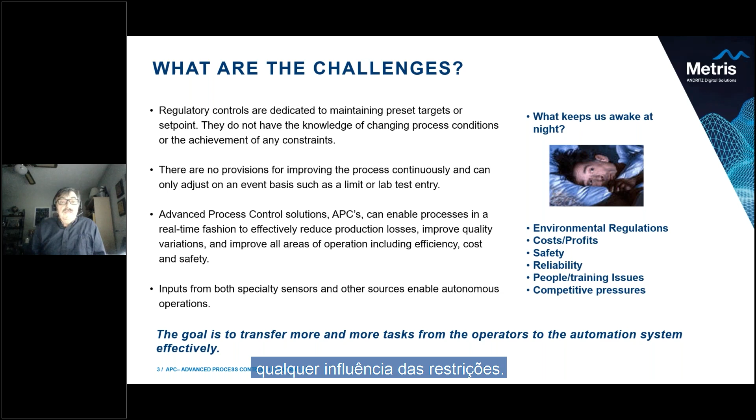Regulatory control, which has been around for quite some time, is dedicated to maintaining preset targets. It doesn't have any knowledge of changing process conditions or any influence of constraints. There's no provision for improving the process continuously, and that's where advanced process control, known as APC, can enable a process in a real-time fashion.

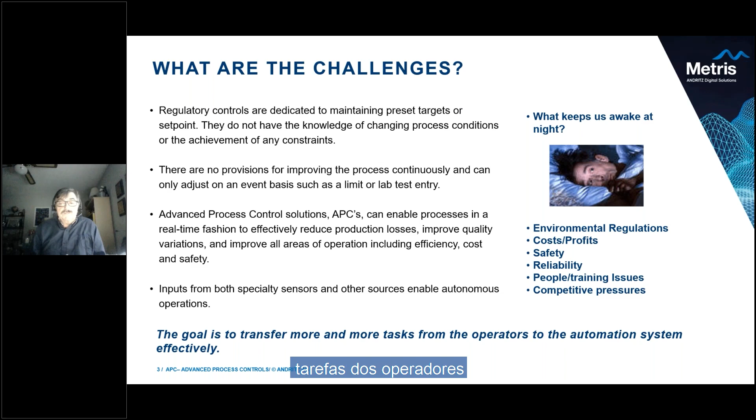Inputs from both specialty sensors and other sources are becoming readily available, which enable autonomous operations. The overall goal is to transfer more and more tasks from operators to the automation system effectively.

So what is advanced control? Control strategies designed to address a higher level management objective. These are centered around things like product quality, throughput, reducing the cost in euros or dollars per ton, reducing energy, and more assuredly complying with regulations such as environmental and all quality specifications. The bottom line here, it becomes a tool that can translate into a process control objective.

APCs can be an enabler to autonomous operations because with utilization of advanced process control, there is less human involvement, especially in dangerous environments where sensors can lessen the dependency of humans going into the process. They're available 24/7. They can be used to react in real time to disruptions, and the requirement for human experts on site every day decreases.

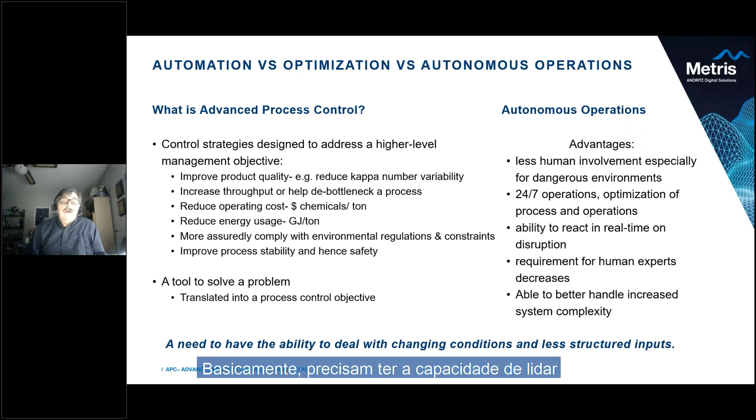Autonomous operations depend on remote operations, and they're able to handle increased system complexity. Basically, there's a need to have the ability to deal with changing conditions and less structured inputs.

As I mentioned, these have a foundation which enables autonomous operations. ANDRITZ solutions have the advantage of being totally integrated and aware of all process changes. The autonomous operations are enabled by the Metris UX/X system.

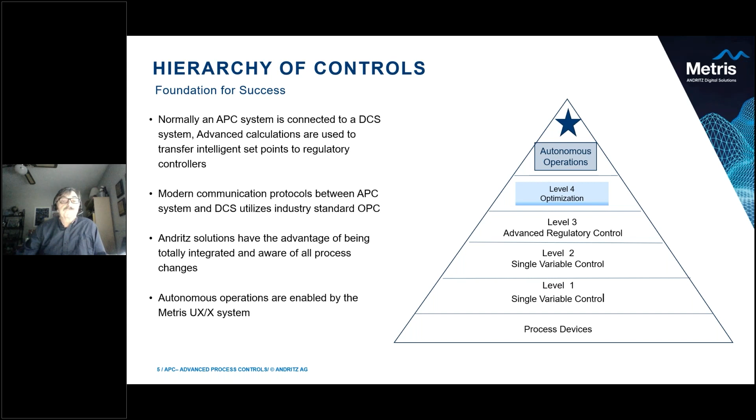So what's the difference between better control and optimization? When we look at control, quite often we consider poor control as a gap between a target and the process variable, as overemphasized on the left, where you have the oscillating process variable. Good loop tuning and good control can show up as less variability and stabilized control. However, that's only improved control, not optimized control.

The line at the top, as indicated by the specification limit, is where we want the process variable to spend more time closer. So making that change, depicted on the right, is allowing us to be closer to the operating limit in this case.

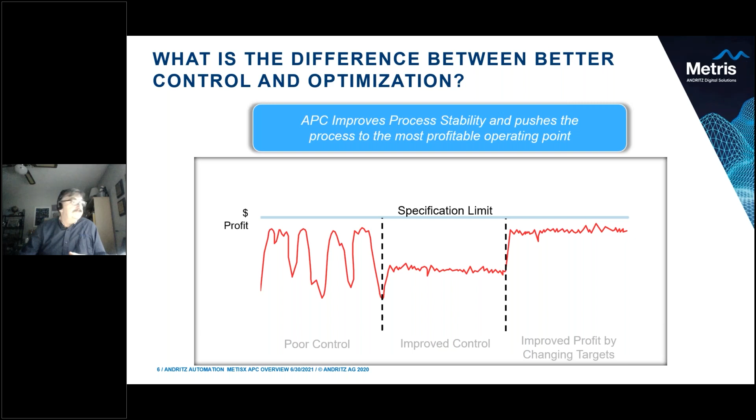So variability reduction in a broad sense enables economic benefits. In every process, there's usually a high side operating limit or a low side operating limit, such as if the customer wants to charge chlorine dioxide greater than 20 kilos per ton, it will destroy the pulp viscosity. Another limit could be if kappa numbers get above 70, it'll plug up the screening system. And of course, in the slaker, if it gets above 100 degrees C, it can cause a boil over.

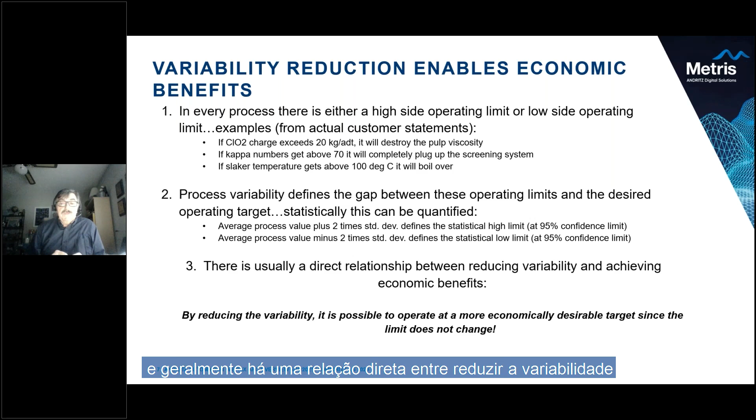So not only reducing the variability, but operating below, but as close as possible to limits, is very important. Process variability defines that gap between these operating limits, and statistics can be used to quantify this, such as an average process value plus 2 times the standard deviation, which defines the statistical limit at 95% confidence. Therefore, you can look at a process and determine how close it's operating to its limit. And there's usually a direct relationship between reducing variability and achieving results.

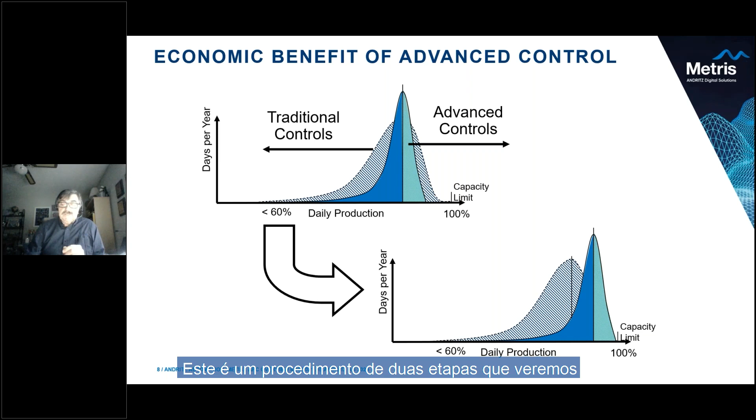So shown here on the left is traditional control, where you have some sort of spread of variability. The first benefit and requirement of advanced control is to first tighten up that and cause a reduction in variability, and then in this case take a target shift to the right, which is closer to the capacity limit. This is a two-step procedure which we'll see several times. So what is a definition of advanced control?

Advanced control is an enhancement of basic process control. It's not a replacement. It's aimed at delivering value to our customers through three main forces: throughput, quality, and cost. APCs utilize a variety of technology to optimize the process in response to business drivers, utilizing minimum resources without compromising throughput, quality, and of course, cost targets.

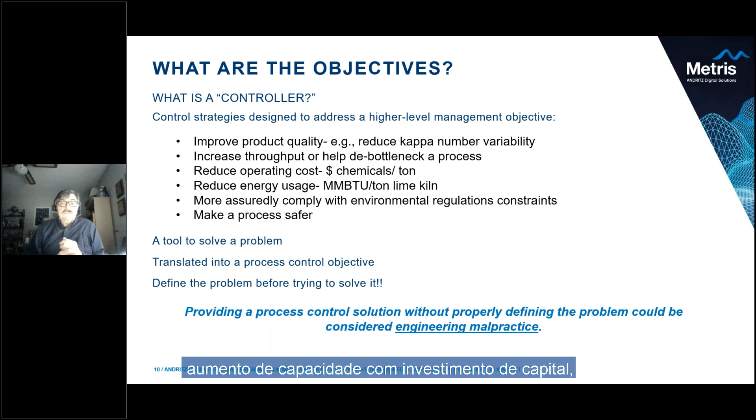What are the objectives? Well, a controller, broadly speaking, is designed to address a higher level management objective, such as a corporate goal to improve product quality, and this starts by reducing the kappa number variability. The customer could want to increase throughput. They have more orders, and it is very expensive, although possible, to increase throughput through a capacity increase with capital expenditures, but sometimes debottlenecking or shifting the variability of production can increase the overall throughput.

Of course, as I've mentioned, reducing operating costs such as dollars per ton, reducing energy, and obviously reducing any environmental constraints. So with better control, you're going to have less upsets, better washing control, will use less fresh water, which puts less load on the environmental system. And obviously, number one is to create a safer process for the operators.

So providing a control solution without properly defining the problem really is the wrong way to approach it. In order to apply a solution, understanding what the real problem is, is paramount.

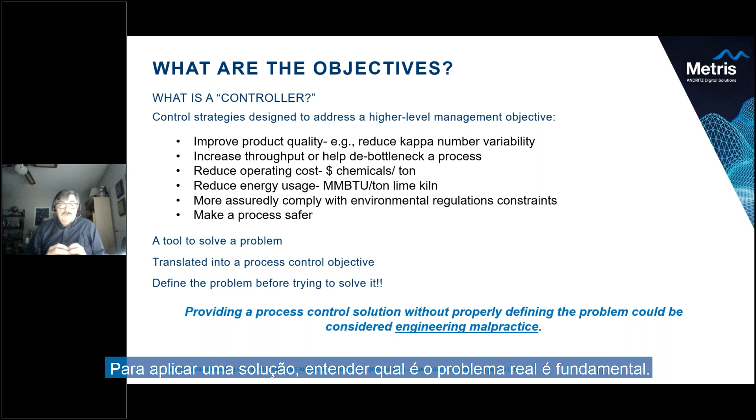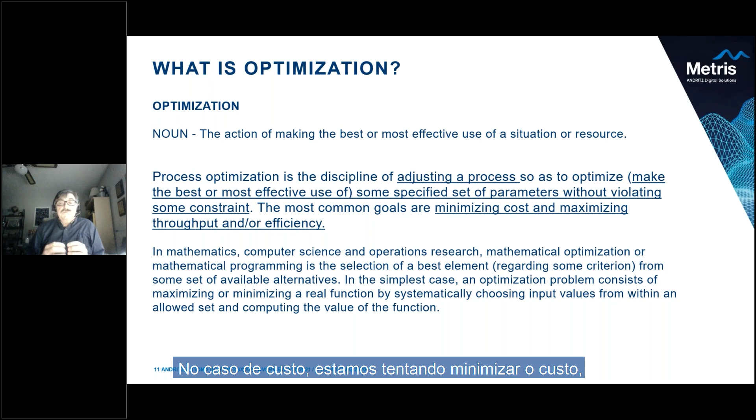So what's the difference between control and optimization? Well, broadly defined, optimization can be a noun. It's the act of making the best or most effective use of a situation. It's a discipline of adjusting the process so as to optimize, using some sort of set of parameters without violating a constraint. In the case of cost, we are trying to minimize the cost, maximize the throughput.

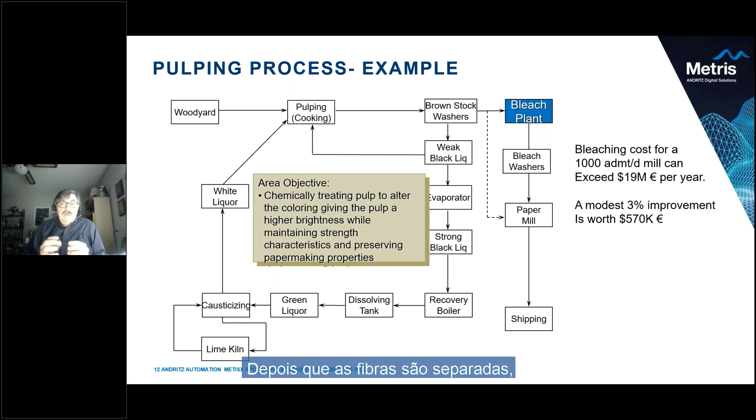So I'm going to look at the pulping process here and focus in on the bleach plant. As we know, the bleach plant is an important process. After the fibers are separated, most of the lignin is removed, and we've recovered the liquor. It goes to the bleach plant for final purification and quality control.

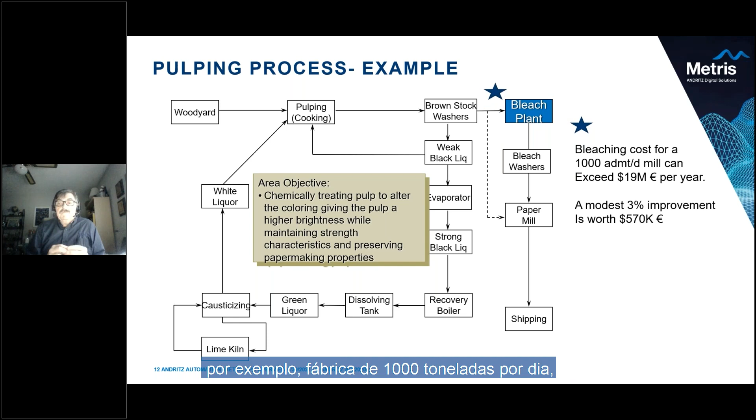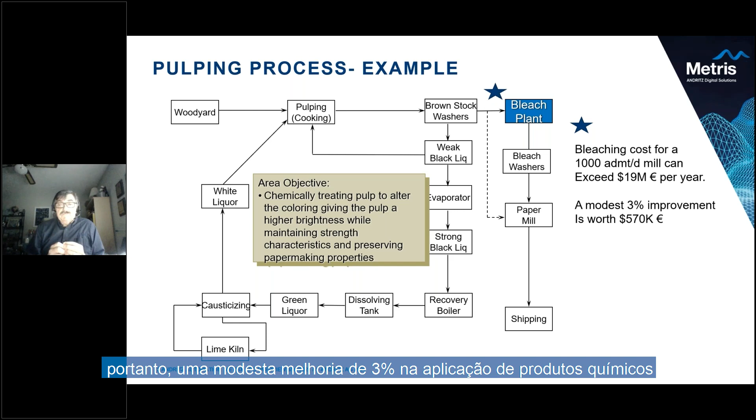It's also a very high cost area. For example, a 1,000 ton per day mill, the cost of bleaching can exceed 19 million euros per year. So a modest 3% improvement in the application of bleaching chemicals could be worth over €500,000.

So quite simply, starting with a loop, this is the front end of a bleach plant where you have a simple loop. We're applying chlorine dioxide, and at the very basics, we're ratioing it to the production. Therefore, we take the mass of pulp and the flow and concentration of chlorine dioxide. We could put it in a mass-to-mass or percent applied.

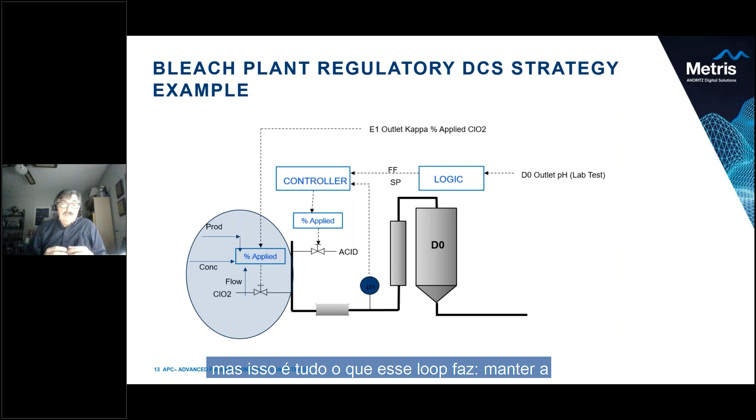So if an operator puts a target in, the regulatory system will maintain this loop to keep that percent applied dosage. Any influences, pressure compensation, variations in the flow, at some point will reach a limit where the valve is either 100% open or closed. But that's all this loop does, is maintain the percent applied, and that's known as a regulatory loop.

However, in the case of bleaching, similar to most other processes in pulping, it's actually a very highly interactive process. So even though we're applying the chlorine dioxide on a mass-to-mass basis of the flow, if there is a change in kappa, such as the kappa increasing, then the brightness will drop unless there's a corresponding increase in the chlorine dioxide.

If the production rate increases, even though the chlorine dioxide, which is ratioed to production, will increase, the retention time in the towers will change and the reaction rates will change, and that too will have an impact on the brightness. So even though the entire process is set up with single loop regulatory controls, it is important and necessary to have a higher level strategy.

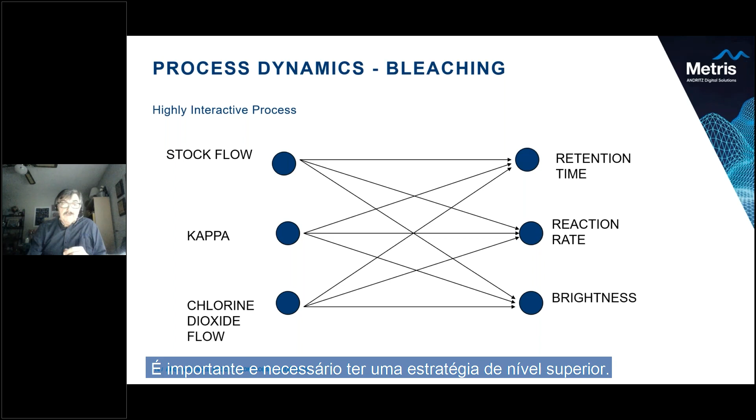So one of the possible solutions that's been identified and is very effective is termed MPC, or Model Predictive Control. This is a control technology that's been utilized for many years in other industries such as hydrocarbon processing. Today it is being adopted and used in other industries such as cement processing, minerals, and of course pulp and paper. It is a proven technology and it provides control solutions using constraints.

It also takes advantage of feed-forward disturbances, sometimes measured, sometimes not measured, and it has the ability to utilize feedback. And it's designed, in the case of bleaching and other pulping processes, to handle delays and strong interacting loops. This makes it a perfect technology to utilize.

On the paper side, our industry was quick to adopt it, primarily due to the availability of sensors and measurements. QCS systems are standard, CD and MD controls, and with the aid of a scanner, the economic benefit of having your paper machine or pulp dryer on control is well established.

On the pulping side, however, it's been much slower due to a general lack of measurements, lots of connected yet not coordinated processes, and challenges with the connectivity to the underlying DCS. Many DCS systems traditionally did not have the horsepower in order to calculate some of the requirements of a model predictive control. And over the years, many attempts have been made with alternative technologies with positive results, but still not optimized results.

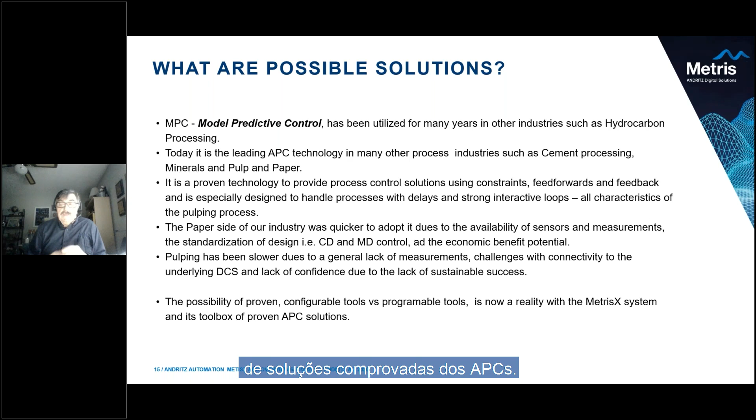As I mentioned, MPCs do have a history. They've been around in the process industry since the late 70s. There have been several examples of model predictive heuristic control, and then later dynamic matrix control. Model predictive heuristic control was later called model algorithm control. DMC was presented back in 1979, and it has been widely adopted. The optimal inputs were computed as a solution to a least squares problem.

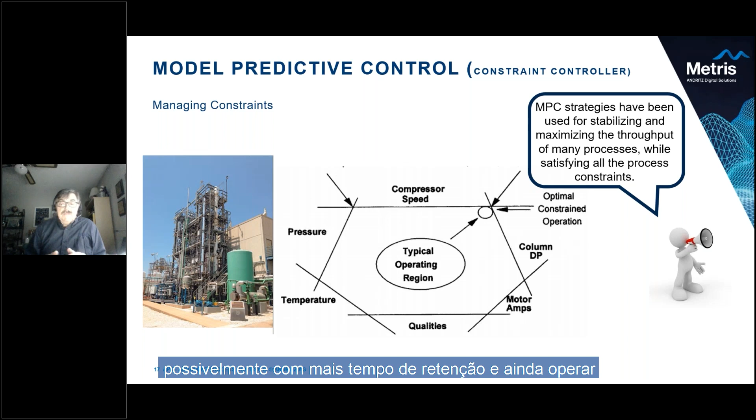MPC strategies are used for stabilizing and maximizing throughput while satisfying all the process constraints. I'll show some other examples, but you can have a reaction that is allowed to give up some temperature, possibly with more retention time, and still operate within the sweet spot, which is known as the typical operating region.

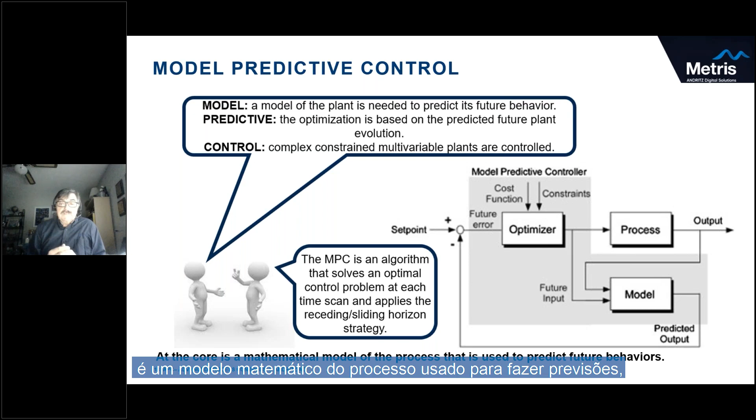...information that has been garnered, such as how the constraints interact, there is a cost function which allows the predicted output to be constantly compared to the set point or the target, and then over a horizon, see what type of change is required. At the heart of it, it's a mathematical model of the process that is used to predict future behaviors.

So the PID only knows what's happened and adjusts the controller based on that, with no knowledge of what's coming. However, the MPC controller has a model of the process, and the control target is maintained with knowledge of what's coming. If the model is good enough, it will always maintain the target.

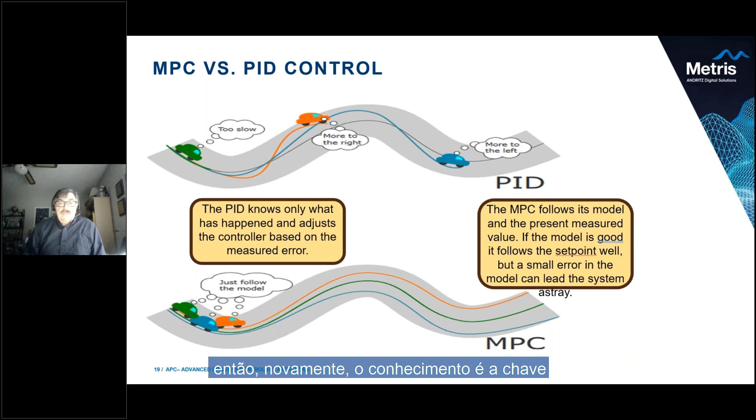However, models are never perfect, and we can utilize what's known as a feed-forward disturbance, where we can say it's raining out, so the road is getting slippery, perhaps slow down, and you are approaching a curve. So it also has knowledge that there are other cars on the road. Knowledge is key, and all of this in an MPC strategy leads to better tracking of the target.

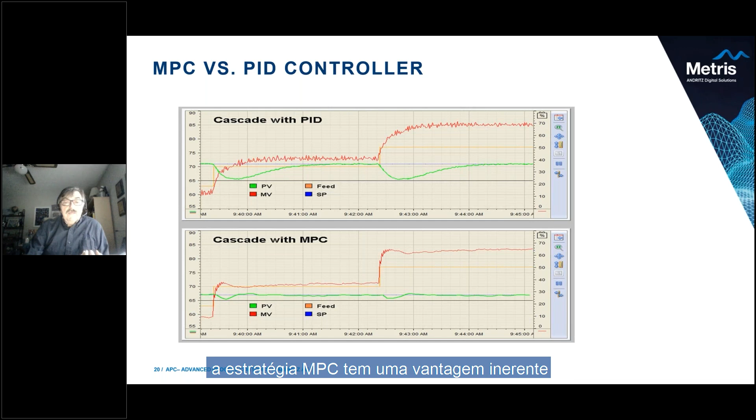So that's a very simplistic view of how an MPC strategy has an inherent advantage over a PID when handling disturbances.

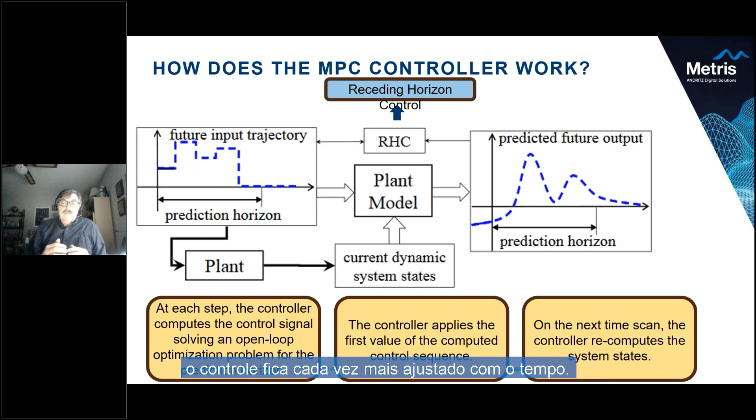That predicted behavior we can slice up, known as the prediction horizon. Each scan, we're looking at where we are relative to where we've been, as well as where we're going—this is very important. It's dynamic, it can handle changing conditions, and by looking at the receding control horizon, the control becomes tighter and tighter with time.

Depending on how you set the control horizon, you can converge to a solution very quickly, or at what's known as the settling time of the process. You can combine it such that any production rate changes to a lime kiln, for example, do not cause the process to go unstable.

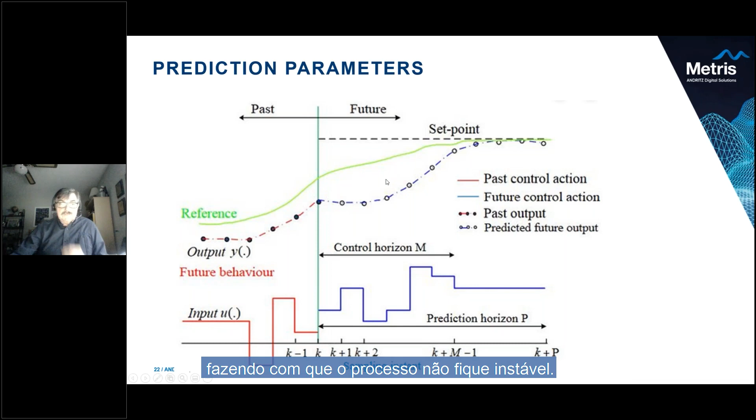Basically, there is an optimization within the MPC that's calculating control actions for the duration of the horizon. The horizon is an adjustable parameter that can be set in the configuration, and what you're trying to do is minimize the cost function between the minimum and maximum prediction horizon.

By tightening up the specification, the control actions are made to predict what's going to happen based on what has happened. This is the key of having a model of the process and having knowledge of where the process has gone as well as where it's going.

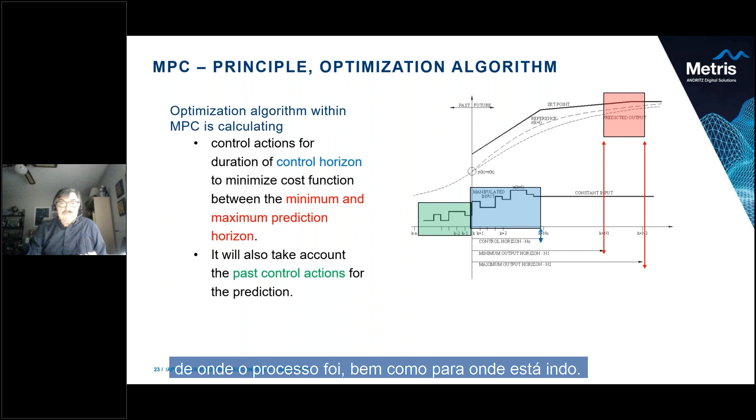So compared here with Unit 1, we can have a collection of the Level 1, Level 2, regulatory Level 3 controls, and every individual PID algorithm would have to be handled independently. Some sort of logic would have to be used to check constraints, and then finally through the DCS, you would put some intelligent set points.

When you're using a model predictive controller, not only do you have the model of the individual process, in this case it's taking up 2 of these controllers, but now we have what's known as local optimization. So the DCS is operating every second. The MPC can operate fast, but it also can be slightly slower because it's going to take the past and future behavior.

And now we have the ability of getting information from an even higher level, which is a plant-wide optimization. So if the production rate is changing at the digester, we will know eventually that production will go into the bleach plant, which not only requires us to adjust some of the conditions of the bleach plant, but we will need more chlorine dioxide. Conversely, from the washing operations, more liquor is going to be sent to the evaporators and then eventually to the recovery boiler. So we go from individual unit coordination to area coordination to mill-wide optimization.

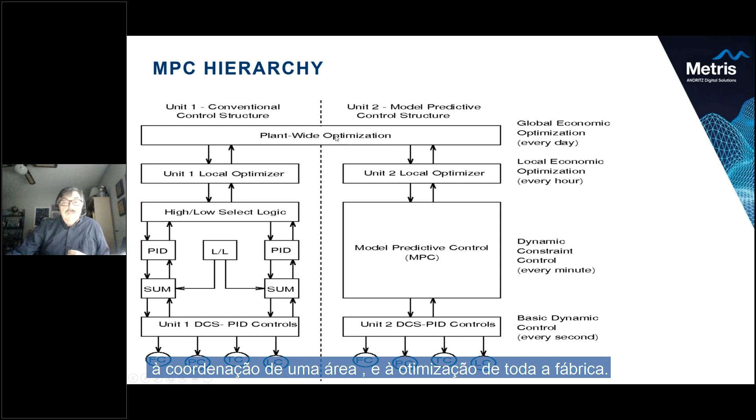So benefits of an MPC: dead time, which is one of the major constraints in the pulping industry due to the long reaction times, as well as the many inventory towers that separate processes, is very difficult to compensate for. There's been many attempts, such as a Smith predictor, to try to compensate for variable dead time. But with an MPC, which is the basis of our APCs, dead time compensation is inherently built in.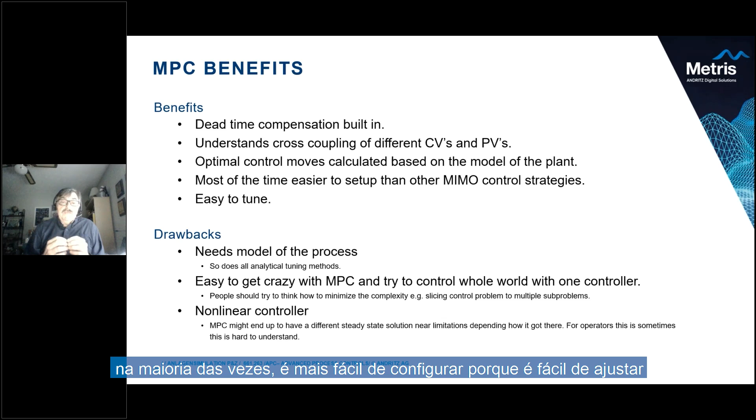An MPC algorithm understands the cross-coupling, so it knows that different CVs and PVs are related, and the interactivity and interaction of the variables are identified. Optimal control moves based on models of the plant, and most of the time it's easier to set up because it is configurable and easy to tune.

Drawbacks are a model of the process is needed, and sometimes people are turning to first principles models, which can be used, and ANDRITZ has tools for that, but a more accurate, robust model can be done by real-time optimization and analyzing the process online. So some of the uncertainties that a first principles model cannot capture can be collected.

It's easy to get crazy with MPCs and try to make gigantic MPCs. It's still good to think about how the process is operating and how we can minimize the complexity. What is the most important or low-hanging fruit that needs to be taken care of first?

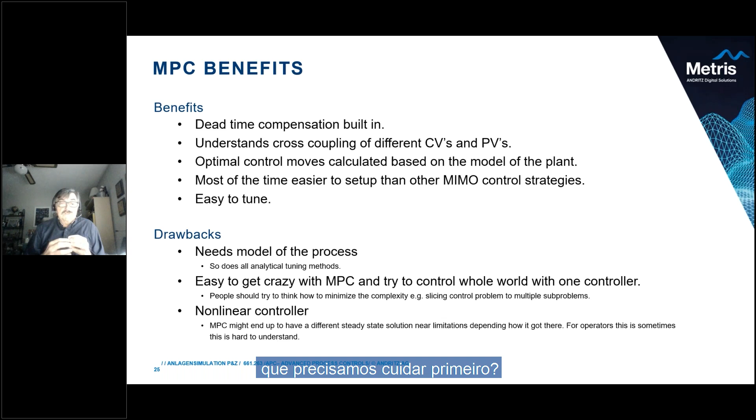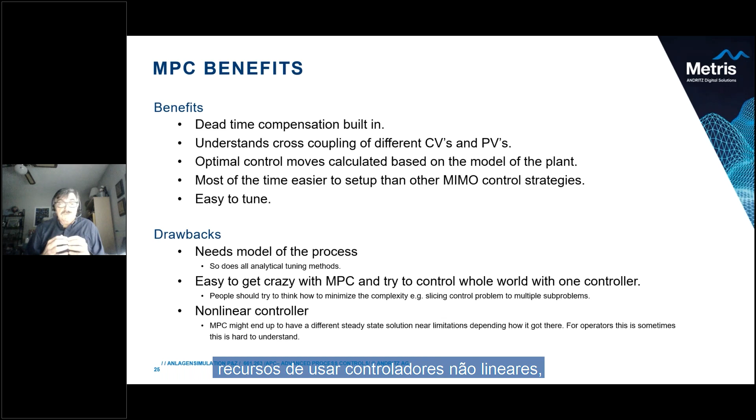Many processes are nonlinear, and an MPC is based on a linear optimization, but what we do is in the range of operating targets, you can make a linear assumption. And of course, there are capabilities of using nonlinear controllers. But for most of the pulping processes, due to the relatively tight targets, it is possible to use the assumption that the process is linear.

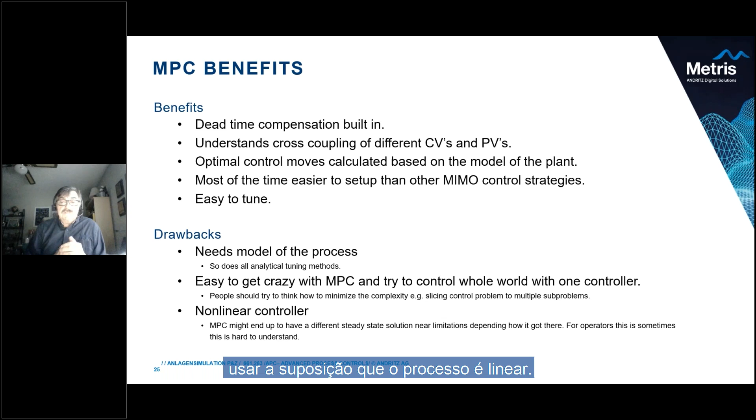But how do you choose the proper solution? Going back to the bleaching example, there really is no one size fits all. Is there a reliable model of the process? Can you excite the process outside of the noise, known as a step test or a bump test, to try to glean information that will allow you to give the history of how the process dynamics behave?

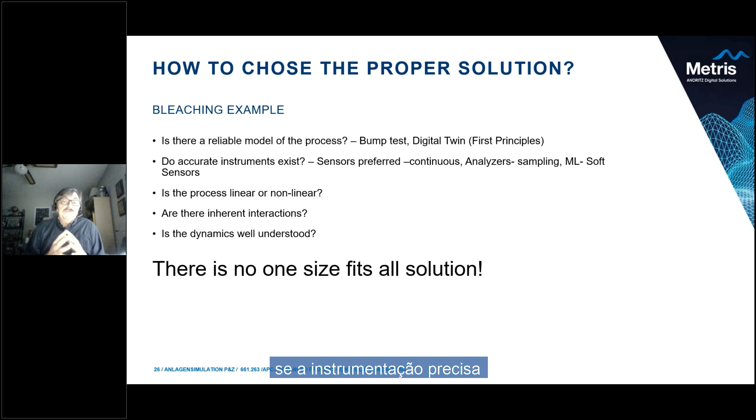Digital twins can be used, including first principles models. However, do you have accurate instruments? Because in both cases, using a first principles model or doing a dynamic bump test, if accurate instrumentation is not available, it's very difficult to get proper information.

Sensors or inline measurements, which are also continuous, are preferred. Although there are many analyzers on the market that are sampling systems, and they too can be used, understanding that they are discontinuous. And then of course, we have machine learning tools that can create soft sensors where measurements do not exist. As I mentioned before, knowing if the process is linear or nonlinear.

Color development or brightness development overall is a nonlinear process, but in the regions that we're operating, we can make some very valid process linear assumptions. It is important to understand and identify inherent interactions, and some of those interactions, such as chip quality, may not be measured, but we know what the impact is. Like if the top separator amps start to go up, we can infer something is changing with the chip conditions.

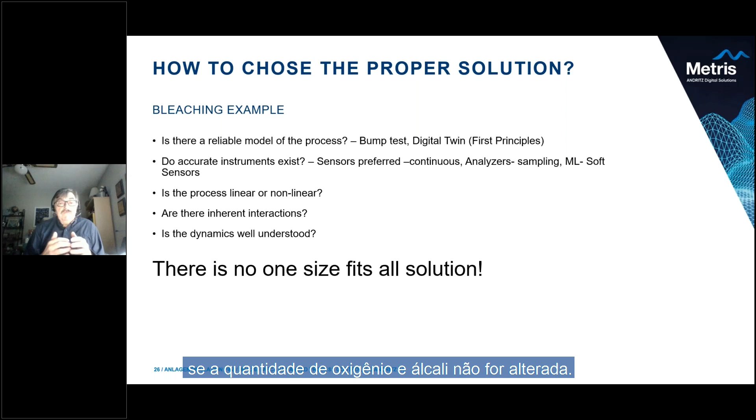And then most importantly, are the dynamics well understood? So in oxygen delignification, the kappa coming into the reactor is going to have a complete relationship to the discharge kappa if the amount of oxygen and alkali are not changed.

So taking a look at the first two stages of the bleaching process as an example of building an APC, I've observed that even though there's two stages, they work in conjunction with each other. And even though they're in the bleach plant, brightness is not the primary control objective for these two stages.

They can be referred to as an extended delignification stage because you must remove the remaining lignin before you start to brighten the pulp, because lignin that is bleached will not be stable, such as newsprint, which is lignin containing. When they brighten it, for example, with peroxide, and newsprint is exposed to the ultraviolet rays of the sun, the cover of the newspaper can revert and take on a brownish color. That is because the lignin was not removed, it was chemically altered.

For most fine papers, copy paper, dissolving pulp, we want to completely remove the lignin. So in the case of those grades, the first two stages of the bleach plant can do that through various oxidants, which are not limited to just chlorine dioxide. The EOP stage has peroxide and oxygen at its disposal, and the sum of all oxidants can be used in an APC strategy with knowledge of the incoming kappa and the target at the EOP washer to control this as one process, dynamically optimized to ensure that the degree of delignification is kept constant at the lowest possible cost.

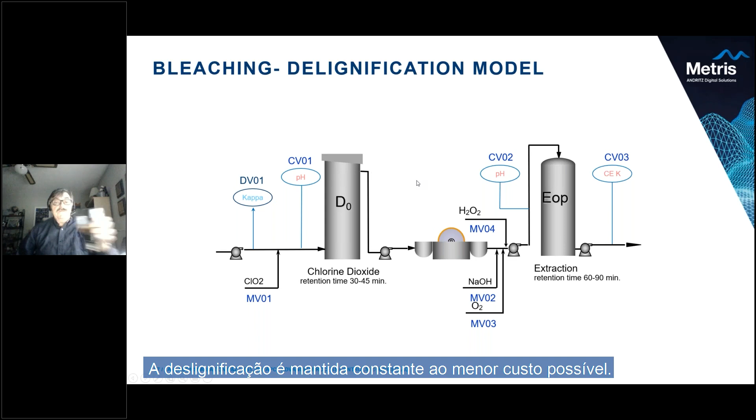After a delay, the pH will start to drop, and the measure of the lignin at the second washer will also drop. Conversely, if you step the caustic, which is added after the D0 stage, there will not be a relationship because this has come after, but there will be a relationship between the E1 pH.

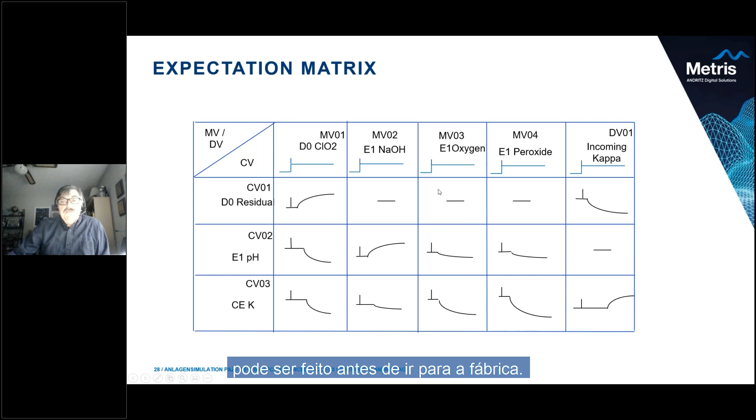So this exercise, known as the expectation matrix, can be done ahead of going to the plant. It can be done with the aid of an operator. The operator doesn't have to have any knowledge of models, Laplace transforms, etc., but just a thought experiment of what relationships do you see in this process.

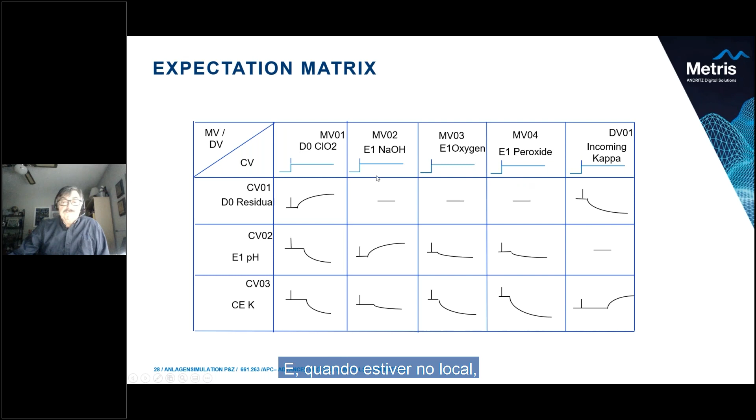And then once you are on site, then the next phase is called model identification. So again, cleaning up the data is very important. Some high pass filtering is used, but low pass filtering is very important. We need to think, is there measurement drift? In a short-term measurement, are we accurately reflecting changes?

So basically, when you try to do closed loop identification, it's real important that you are identifying the model of the process dynamics and not the noise. So that's one of the problems.

There's been a lot of work on closed loop identification, and that's also known as going back into a historical database and trying to find relationships. Quite often you can find those relationships, but as I mentioned before, the robustness of that model will be dependent on the amount of information that we gleaned. Did you excite the process sufficiently to get back information and just not process noise? This is a big concern in all of our units.

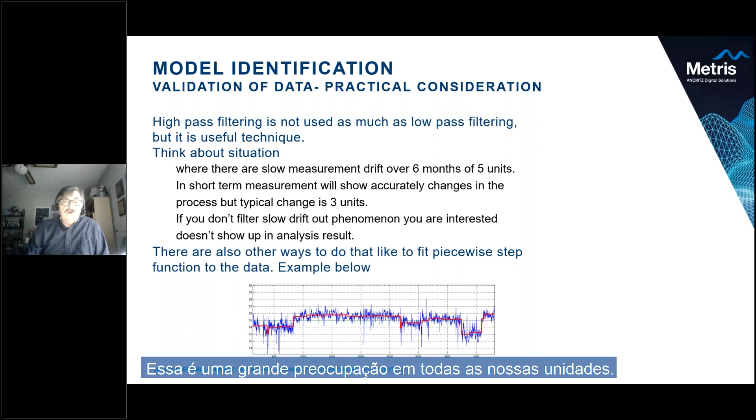So if we go to the next step and that we try to look at what are we trying to do. So we've clearly identified our control objective as the delignification control. We have an incoming kappa, which is the measure of lignin. We have the incoming kappa measurement. We have the production rate, which again is another source of error. We have to make sure that the pulp consistency is controlled as well as the stock flow, because all of the chemicals eventually are going to be updated based on a remote set point coming from the APC.

So in this case, we have, as I showed earlier, the chlorine dioxide dosage control, which is the volumetric flow of chlorine dioxide solution times the concentration to give the mass of chlorine dioxide, and then divide it by the production rate or mass of fiber to deliver it in percent applied or kilos per ton, which is a very common regulatory control strategy that's ratioed only to production. Now we're going to give a remote set point that's based on not only the incoming kappa measurement, but what the resulting kappa is going to be 1 to 2 hours later.

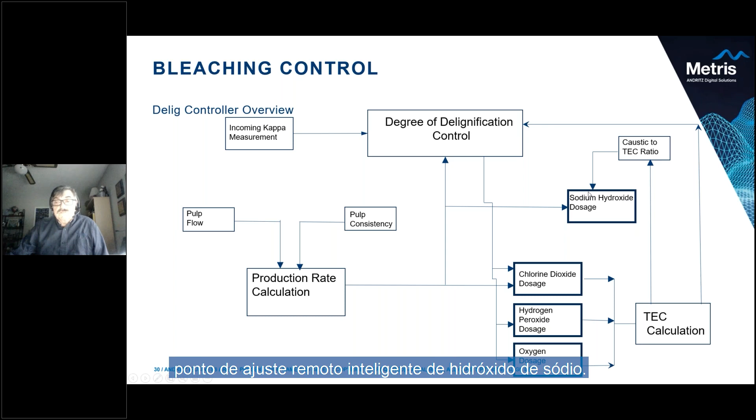Once we've identified the process and the control strategy, if we turn to our Metris UX platform, shown here as the dashboard, we select the application studio. Shown here on the right, we have a toolbox of all the APCs that exist, as well as the building blocks to select which control we want to build.

This can be done remotely as long as there's a remote connection to the DCS, because all of the values are brought in via an OPC link.

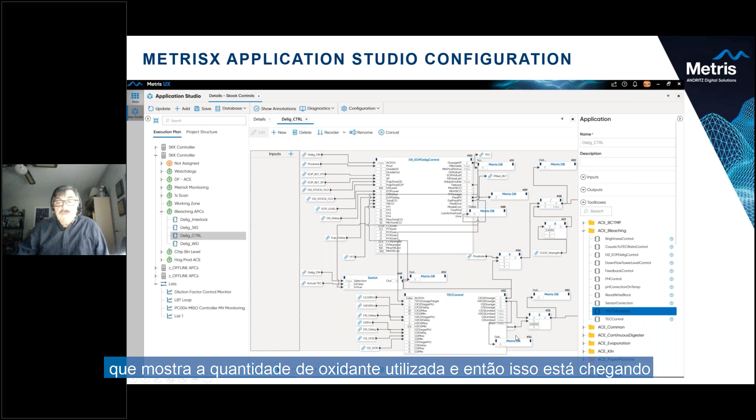This is kind of difficult to see, but this is the Delig controller where it's a drag and drop, and you just attach the various inputs, and on the right is shown the outputs. There's our Delig controller, and then there's our total equivalent chlorine controller, which is given the amount of oxidant used, and this comes up to give the dosages to the DCS. On the left is the actual block.

A compilation of all those individual blocks has been pre-configured into an APC block known as the D0 EOP delignification controller. It manages all chemicals dynamically. It's been fully tested and optimized, and any cybersecurity risks, which are very common - code is a very common vulnerability if it's not done correctly. All of the ANDRITZ Metris UX blocks are certified to have zero defects, and there's a quality assurance certificate for every block.

The objective is to manage all the chemicals dynamically, taking advantage of both feed forward, kappa, and feedback. Shown here again is the process overview, where you've got the kappa and the production rate, the D0 stage, the peroxide, the oxygen, and there's feedback. This is all handled now in an APC block known as the Delig controller.

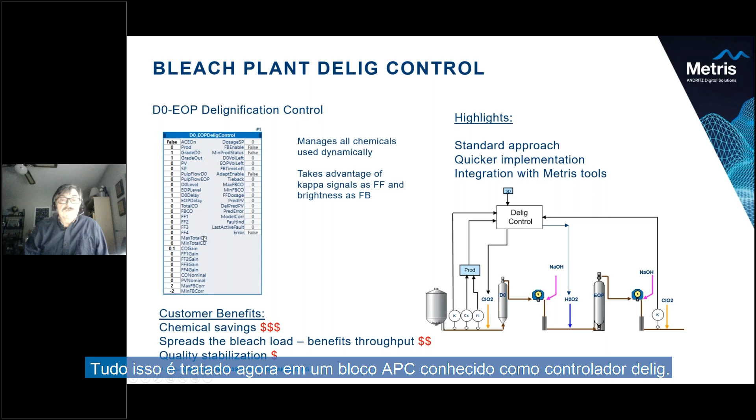Results are very important, of course. Shown here is a recent project with two different bleaching lines, and in the before and after case, we had a 3.2% improvement in the D0 ClO2, but a 17% improvement in the peroxide. So in this case we've minimized the use of chlorine dioxide by maximizing the amount of peroxide. From an economic standpoint, peroxide is often cheaper than chlorine dioxide, so to get the same amount of bleaching, the APC in a real-time fashion has balanced the amount of chemicals.

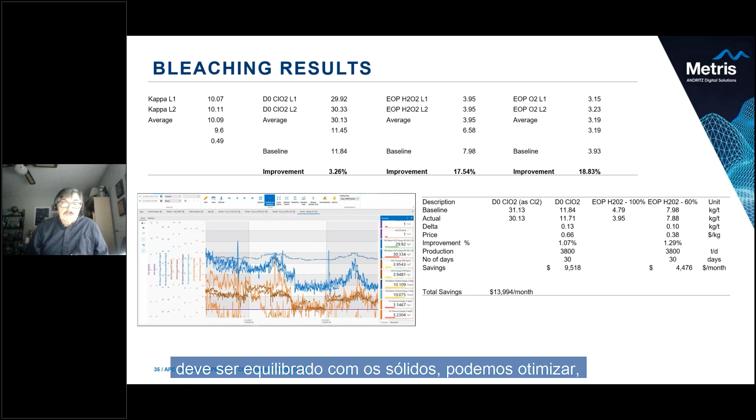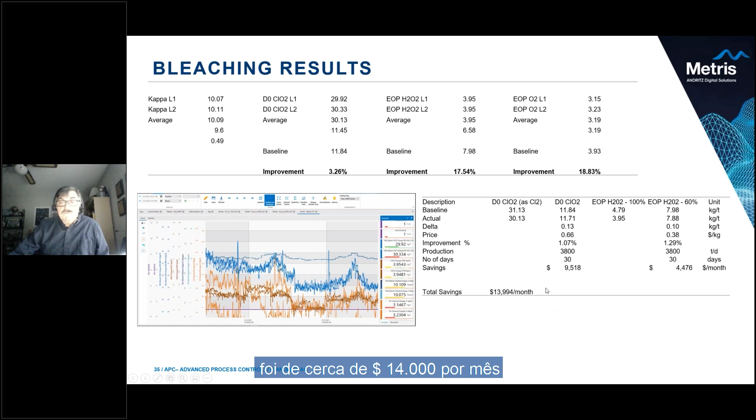This is a proprietary algorithm that shifts the bleaching load as well as optimizes between oxygen, peroxide, and chlorine dioxide. Similarly, for the brown stock washing operation, where the degree of washing has to be balanced with the solids, we can optimize the dilution factor. The benefit of this control at this mill was about $14,000 a month, and it was very quick to implement.

Another area of the mill that is well suited is in mechanical pulping, or TMP. Shown here is the process where we've identified the necessary inputs. We've segmented the control into a stabilization controller, which in the case of refiners is adjusting the plate position to maintain the energy used. Then with a quality feedback, in this case freeness, a second controller is used to cascade set points, remote set points, to the energy for the stabilization controller.

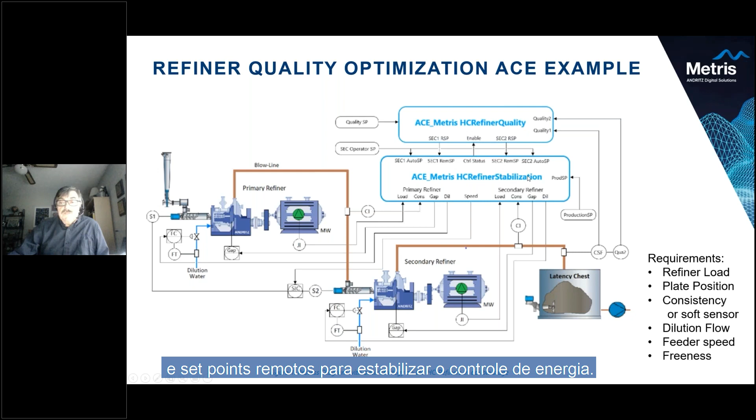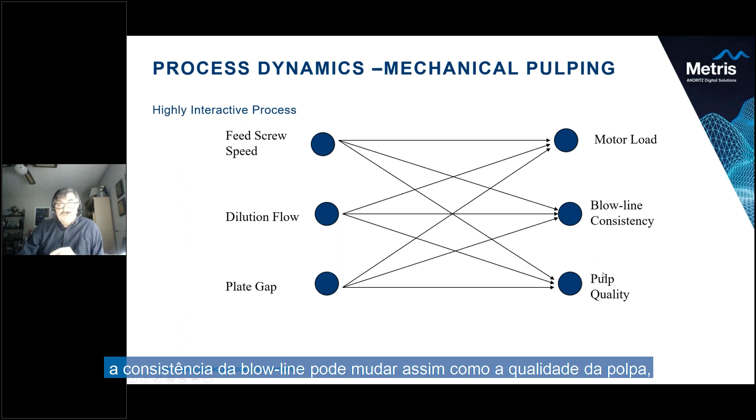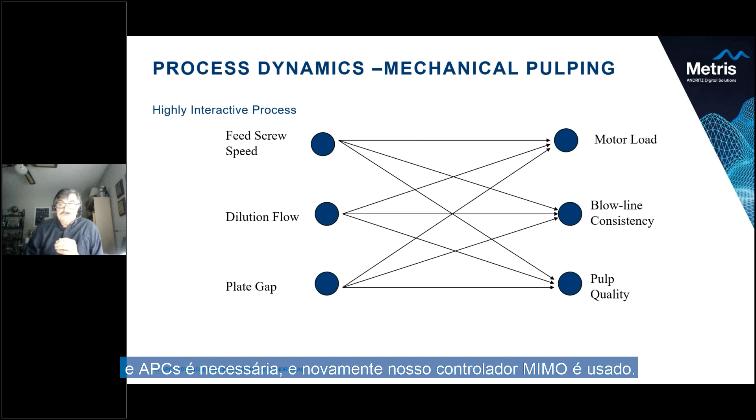In the simple representation, we know that the feed screw is very important for motor load. If the dilution flow is changed, that will also affect the motor load. And if the feed screw is changed and the plate gap is adjusted, blowline consistency can change as well as pulp quality. So it's very difficult to control the refining process simply as a collection of single loops. An APC is required, and again our MIMO controller is used.

So here it's a multivariable control using a MIMO that allows for rejecting the disturbance of a production change and still maintaining the freeness target.

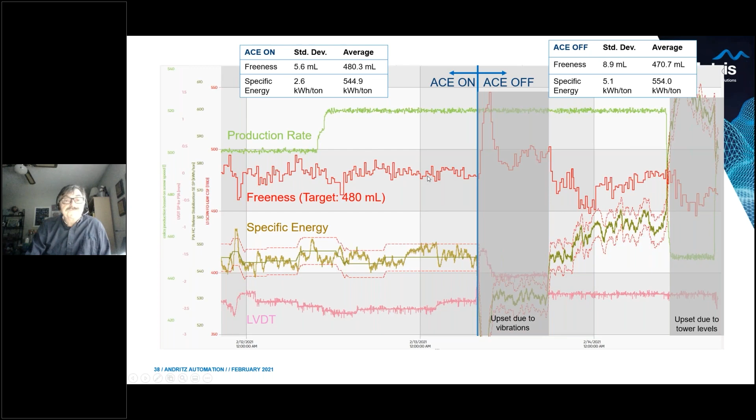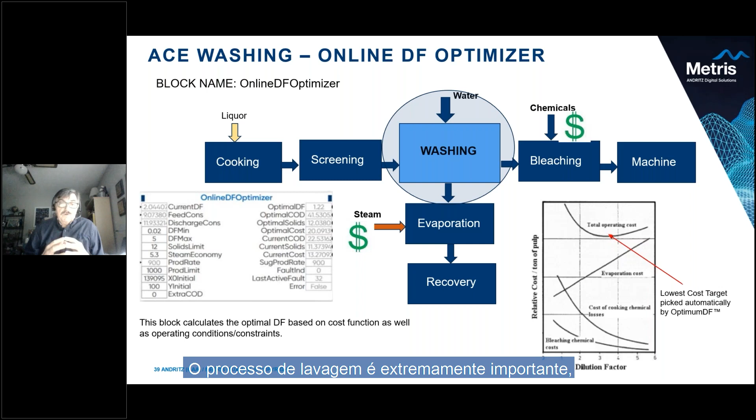I mentioned earlier, washing is another prime candidate for an APC. The washing process is extremely important as that's the crossroads where you're trying to send as clean as possible fiber to the bleach plant, but also by adding more water, you're going to dilute the liquor, which goes to the evaporation process. And the more steam you use in order to meet the recovery spec, which produces steam, you're going to be wasting money.

So if you cut back on washing, yes, the solids will go up and the evaporator costs will go down. But if you underwash the pulp, the carryover of the dissolved lignin and the inorganic portion will directly consume chemicals. So what's needed here is an optimum set point called the dilution factor.

These curves show the evaporating cost. As we increase the amount of water, we increase the dilution factor, therefore the cost of evaporation goes up. And as we increase the amount of water, the cost of bleaching is going to go down because it's nice clean pulp.

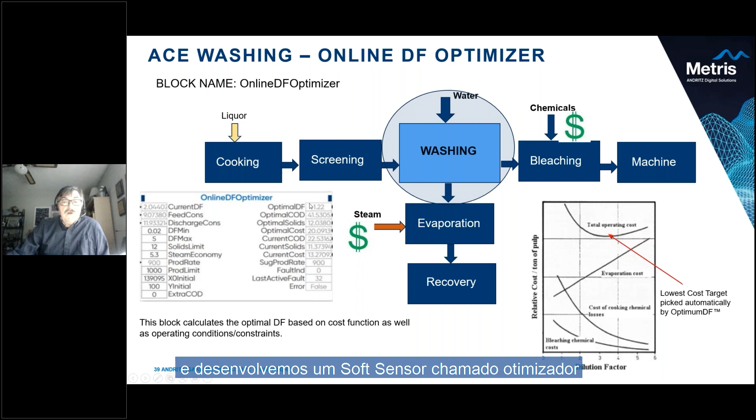Since we can't operate at an unlimited dilution factor, nor can we not wash the pulp because we need to recover the chemicals, an economic optimum is required. We've developed a soft sensor called Online Dilution Factor Optimizer in the Metris UX environment, which reads the real-time bleaching costs as well as the evaporating costs, and then advises the washing APC of what the correct set point is.

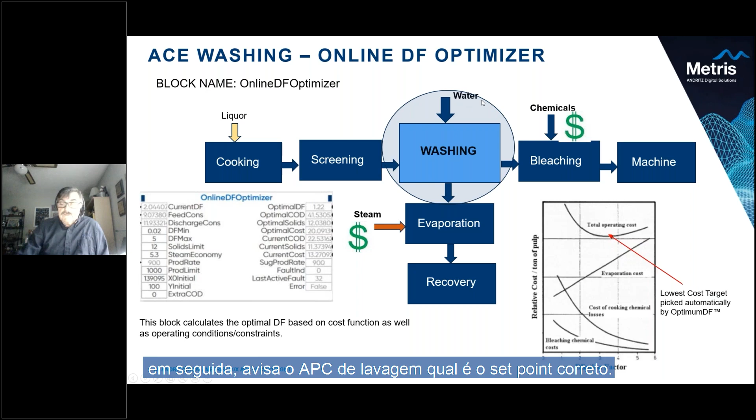ANDRITZ, being a supplier of all of the equipment for a pulp and paper facility, we have developed APCs, or advanced process control applications, for every area. They are modular in format, however they are also connected due to the coordination that is required. We can coordinate from a cost basis, we can coordinate from a production management perspective, which is a huge opportunity.

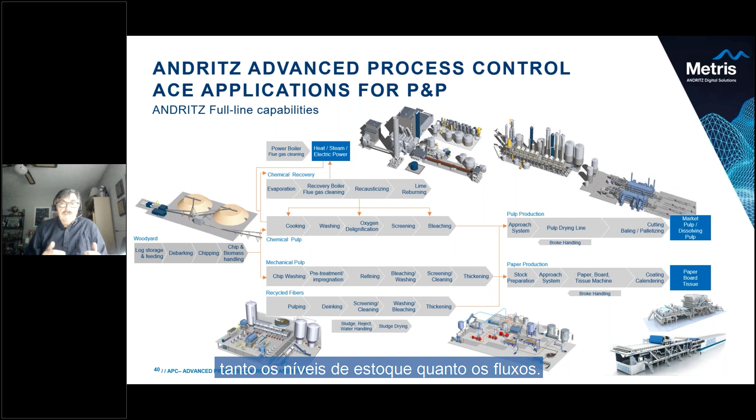An APC can manage upstream and downstream disturbances such that if a maintenance outage is required in the bleach plant, we can adjust the fiber line and pulp dryer productions such that the downtime in the bleach plant is not disruptive. Those are real-time calculations where the APCs are managing both inventory levels as well as stock flows.

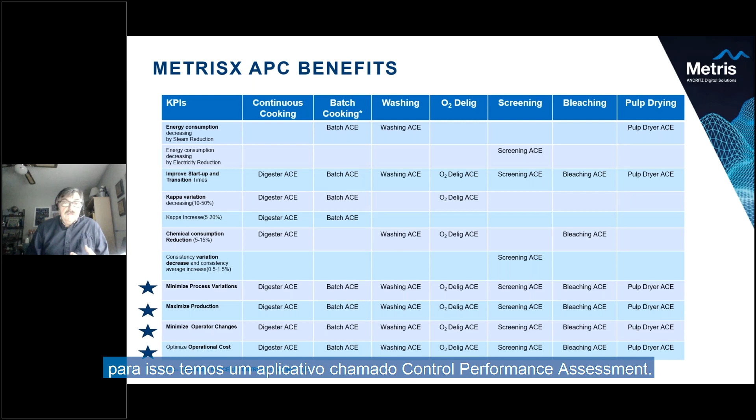That in itself is a combination of understanding that the valves are performing correctly. So we have an app called Control Performance Assessment. We have trending tools to show how the process is acting over time. We have a production management app which will coordinate production, and by stabilizing, we are going to minimize process variations.

Maximizing the production is always a goal. We want to push fiber to the machine. We want to pull liquor to the recovery. And that requires not only inventory control within each unit operation, it also requires coordination from a global or mill-wide perspective.

Of course, we're trying to minimize operator changes, so the number of changes that the operator needs to make can be substantially reduced. The fact that we have model predictive control means it can do a better job than an operator in anticipating dead times.

The APCs can coordinate processes that can be several hours long, as well as understanding what the trajectory or the dynamics of the process is going to be.

And then finally, we are trying to optimize the operational cost. Certain areas, such as bleaching, we might have to increase the use of one chemical, such as peroxide, but at the benefit of reducing a more expensive chemical.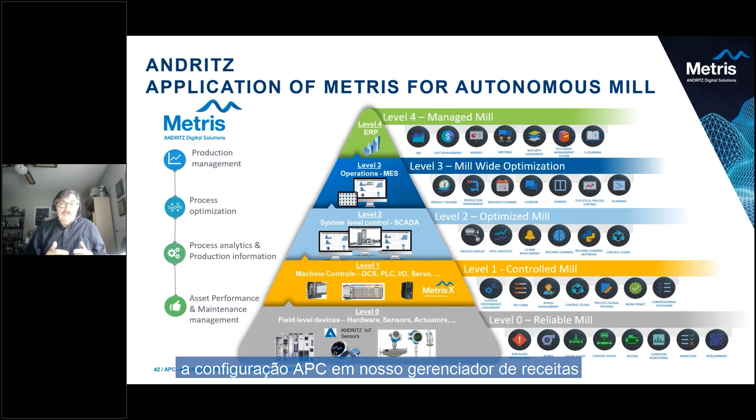Grade changes are handled by an APC. Recipes are very easily implemented. And if a mill wants to campaign between two different species, the APC configuration in our recipe handler is the perfect place.

Now, to summarize, some keys to a successful APC project. You can't simply put new software or new technology on an uncontrolled process. It would be like putting a bow tie on a bum - you're spiffing up the appearance, but really not doing a complete job.

One of the first things we do, rather than trying to sell a product such as an APC, which is a product, we want to sell a solution. And you need to know what the problem is.

The best and most effective way of determining the true problem is to perform an audit, and this starts with variability identification. We're able to identify not only the capability of your process, but we can compare it to other processes on the basis of coefficient of variability. It doesn't matter if the targets are different, we have a benchmarking tool which shows what the variability should be on a well-controlled process.

Which leads us into step 2. It's imperative that you tune and optimize the regulatory loops. We will be updating remote set points for things like temperature, dosage, and fuel, but ultimately those set points are going to be delivered by a regulatory loop. If the valve is not performing or the regulatory controller is not properly tuned, the APC will not be able to handle all of the disturbances.

Quite simply, a PID is a single input, single output. So when we describe a process, yes, there is a flow controller, yes, there is a temperature controller. But when you put that together, the entire process is described as a MIMO, multiple in, multiple out. We can also have multiple inputs, single output - that's known as a MISO. So when we consider an APC for an entire process, that's why we look at all the interactions, and it results in a multiple in, multiple output, highly interactive strategy.